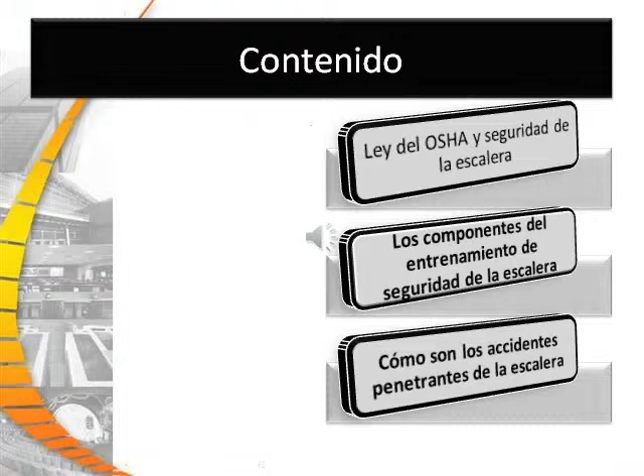Introduction to ladder safety. Falls from ladders and scaffolds are a leading cause of serious and fatal injuries in residential construction. The goals of this course are to help you understand how to correct and eliminate fall hazards, comply with safety requirements and hazards on your job related to scaffold and ladder use, and understand OSHA scaffold and ladder use requirements.

Participants can use the information from the seminar to provide training to their fellow employees, as well as to implement a ladder and scaffold safety program.

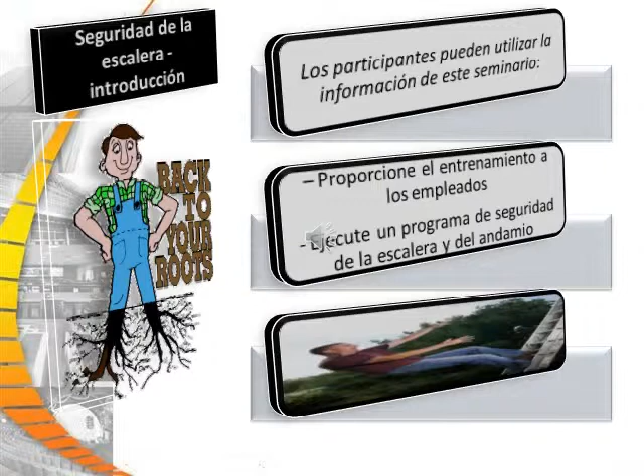Our course objectives will be identifying the importance of preventing falls from ladders and scaffolds, recognizing fall hazards associated with ladders and scaffolds, identifying the OSHA requirements for ladders, stairways, and scaffolds, and identifying work practices for using ladders and scaffolds safely.

Section 2. Importance of ladder safety.

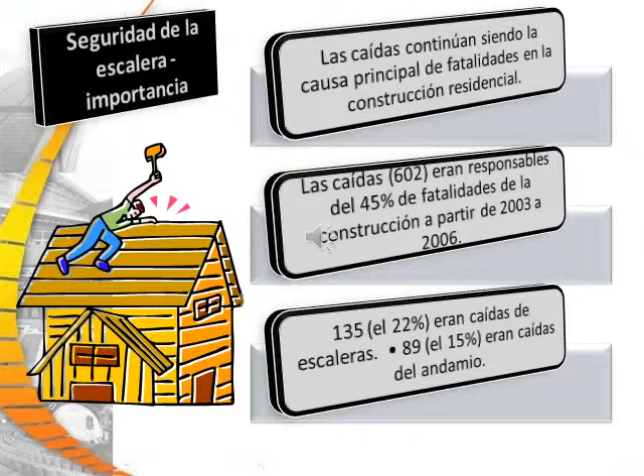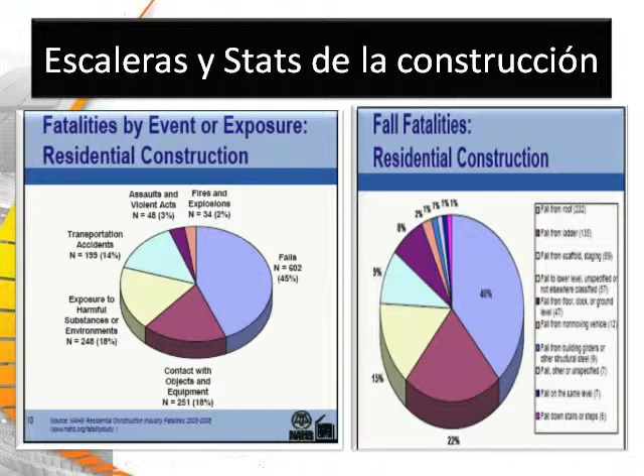1926.451 states that each employee on a scaffold more than 10 feet above the lower level shall be protected from falling. Subpart X covers ladders and states that fall protection is not required for workers climbing or working on portable ladders. It also states that stairways with 4 or more risers, or rising more than 30 inches, must be equipped with at least a handrail and one stair rail along the unprotected side.

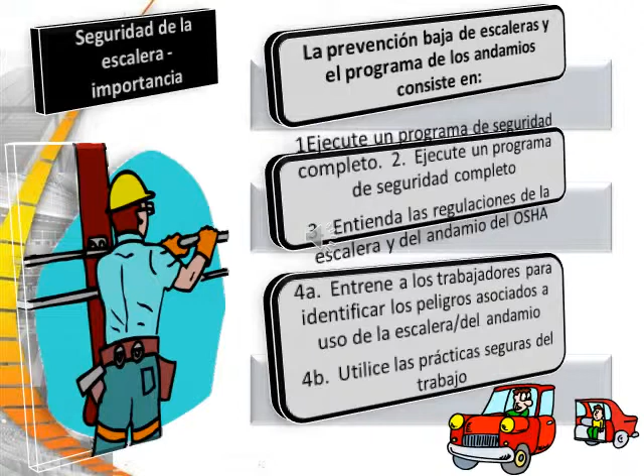Preventing falls from ladders and scaffolds consists of implementing a comprehensive safety program, understanding the OSHA ladder and scaffold regulations, training workers to identify hazards associated with ladder and scaffold use, and using safe work practices.

Part 3. Choosing a ladder for the proper work situation.

First, determine the proper ladder to be used based on weight capacity and height. Next, calculate the proper pitch of the extension ladder for the correct setup, and identify how to secure and stabilize the ladder. Then identify how to maintain a safe position while using the ladder.

Improper ladder setup: portable ladders not extending 3 feet above the landing surface, not securing the ladder correctly, standing on the top 2 steps of a step ladder, and overreaching when working from a ladder. These are all potential ladder hazards.

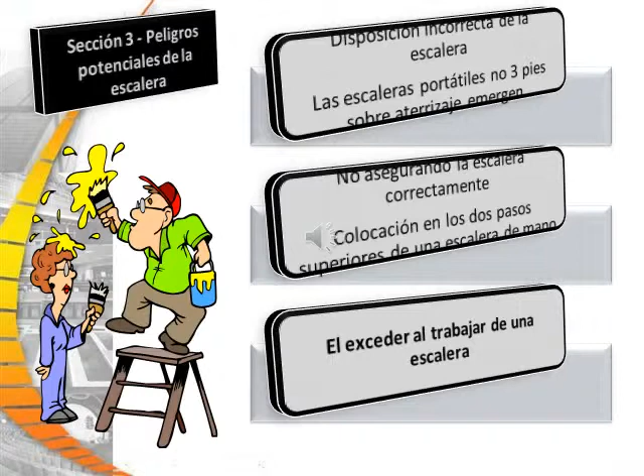Before stepping onto a ladder, think about these things: the duty rating of the ladder, what capacity it can hold, the height of the ladder, whether it's too short or too tall, the condition of the ladder, and any instructions unique to the ladder selected.

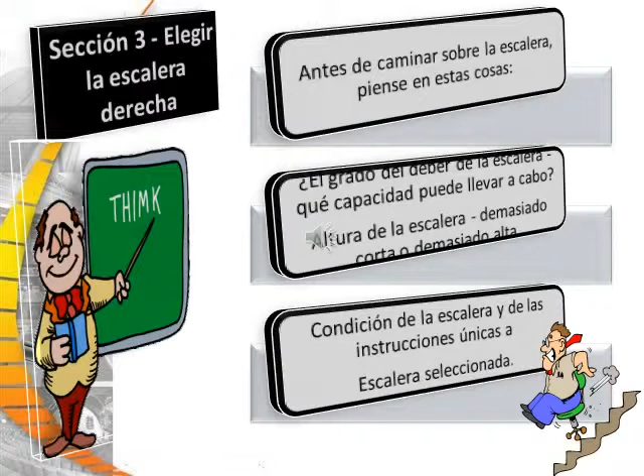Let's review the proper duty rating and capacity of ladders. 1AA are special heavy duty ladders, rugged, for loads up to 375 pounds. 1A ladders are extra heavy duty industrial ladders for 300 pounds. 1 ladders are heavy duty industrial ladders for 250 pounds. 2 ladders are medium duty for 225 pound capacity, and 3 ladders are light duty household ladders for 200 pounds.

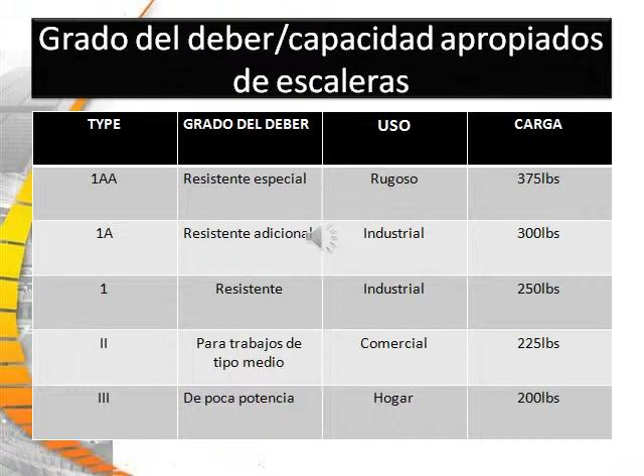The OSHA requirement for ladders: they shall not be loaded beyond the maximum intended load capacity for which they were built, nor beyond their manufacturer's rated capacity. So states the general duty clause.

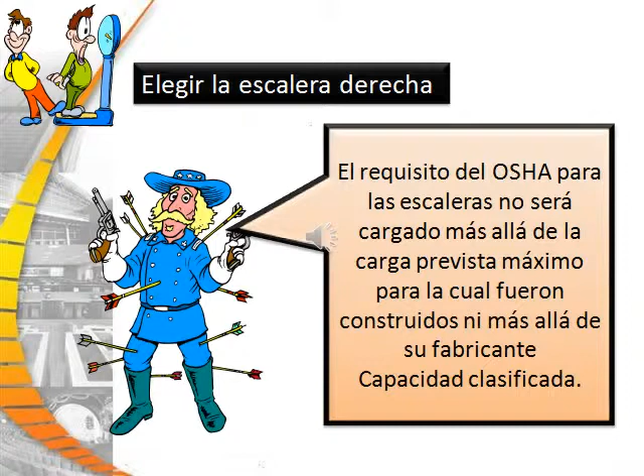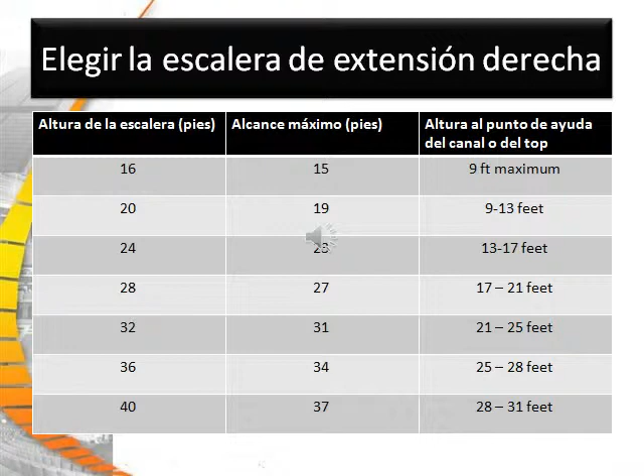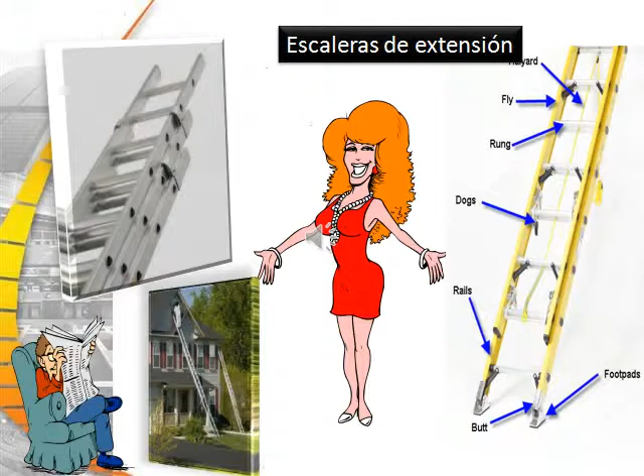Support points for extension ladders reflect the extension overlap, ladder angle, or 3-foot extension above the roof. Good job, comrade.

Remember, the proper ladder setup calls for considering the proper placement and pitch of the ladder. Secure and stabilize the ladder. Good job.

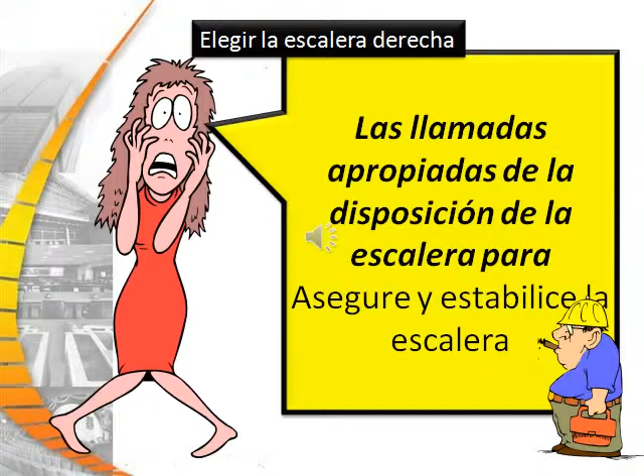Choosing your pitch extension ladder. Remember, extension ladders should be used at least on a 4-to-1 pitch. For every 4 feet in height, the bottom of the ladder should be at least 1 foot away. An example of this is 20 feet in height is divided by 4 for a 5 feet pitch.

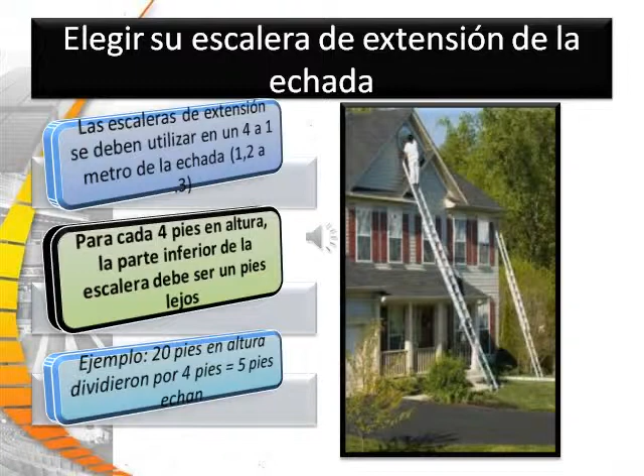When accessing another landing, the ladder must extend at least 3 feet above the landing to provide a handhold for getting on and off the ladder. Never stand on the top 2 steps of the ladder to avoid overreaching.

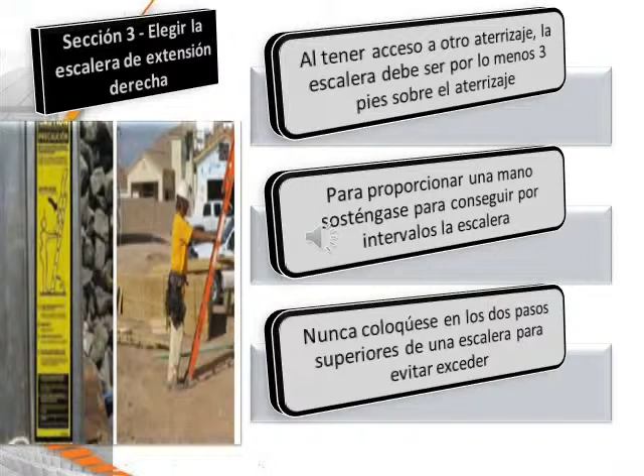Extension ladders should be secured at the top and bottom to prevent movement. The base of the extension ladder should be secured at the base with safety feet or through other effective means.

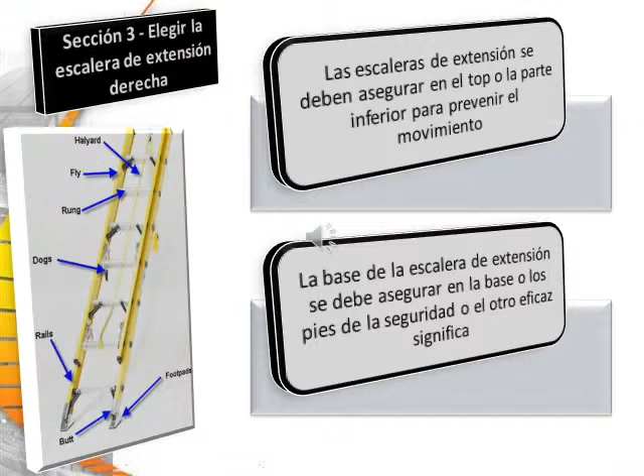To the left on this slide, you'll see that it can be seen above the landing where the ladder is to be secured. Also notice the length of the extension over the landing that is about to be used. At the base, you should see the safety feet, as well as the condition of those feet, which should never be used when the feet are worn out.

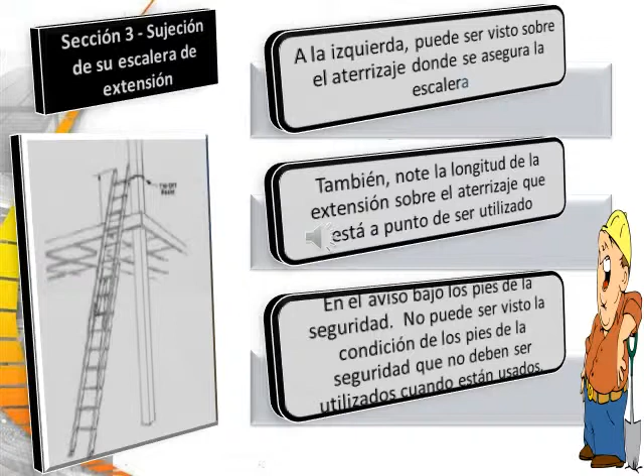To the left is a graphical representation of the proper method of securing the feet. Just below the top graphic is a second example of how to secure the feet.

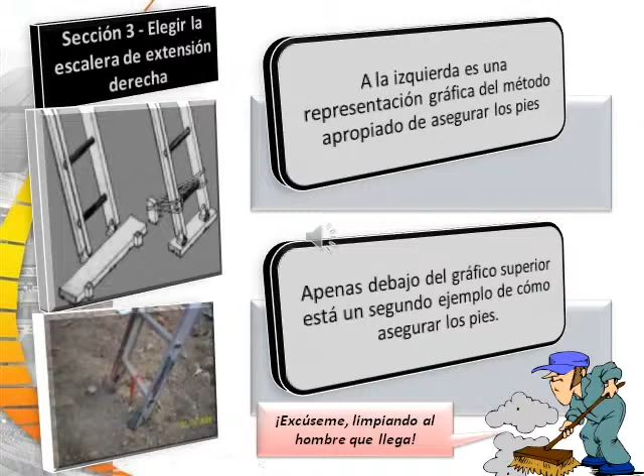Section 3, Securing your extension ladder.

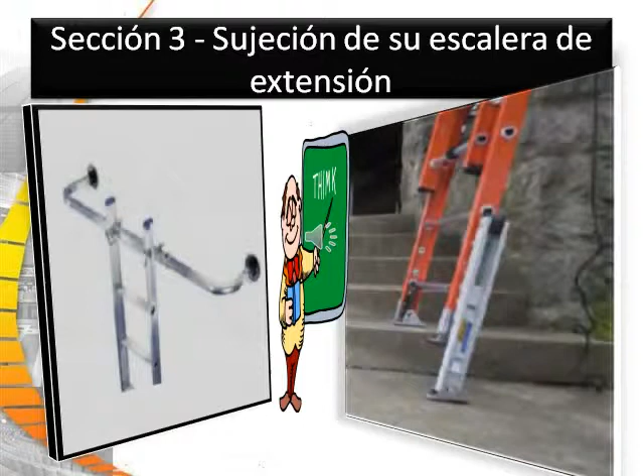On the left, notice how the ladder is placed at a 75-degree angle. Also on the left, notice how the ladder can sometimes be buried in the sand for safety.

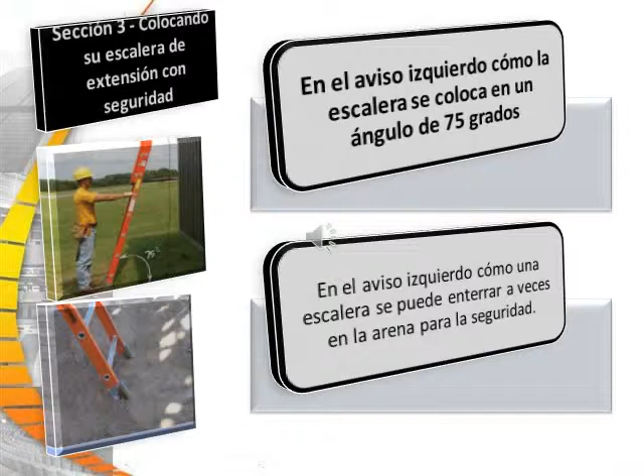Okay, let's say you've chosen your step ladder and you're ready to start using it safely. Let's discuss that.

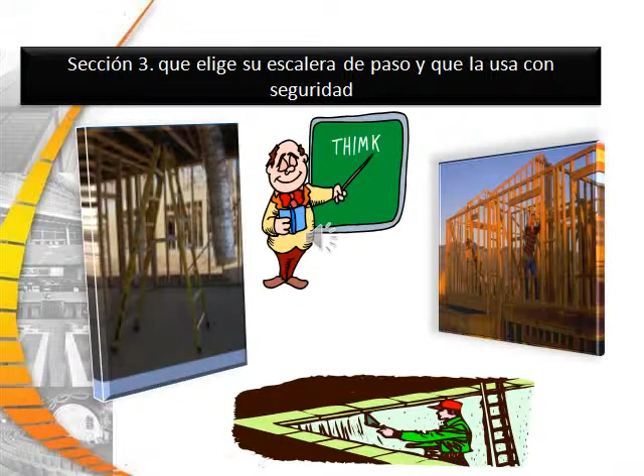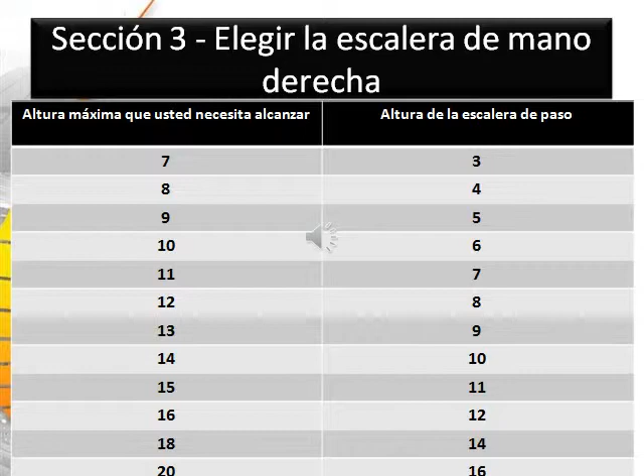Use your stepladder only while it's in the fully open position. Do not use your stepladder when it is folded or in a leaning position. Never sit or stand on the top 2 rungs. Consider the work height when selecting the stepladder.

Stepladders are designed for use in the open and locked position. Do not use a stepladder in a folded or leaning position.

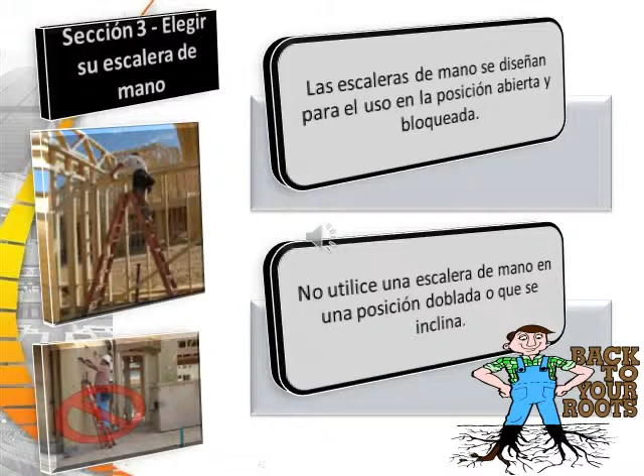Face the ladder when ascending or descending. Maintain at least 3 points of contact at all times. Keep your body centered on the ladder and never let a belt buckle pass either side rail.

That definitely makes horse sense to me.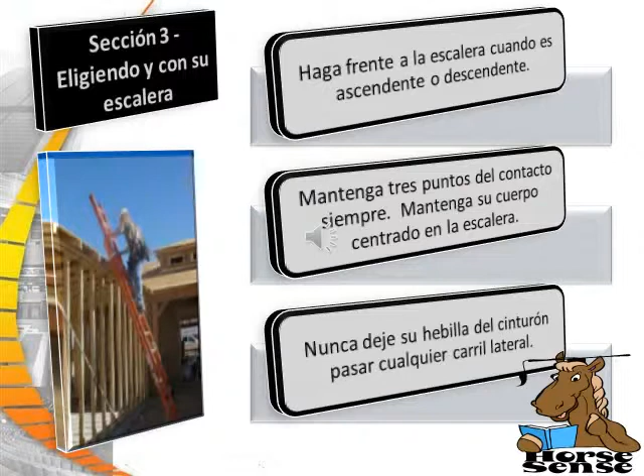Ladders must be inspected before each use. Broken or weak ladder rungs found when inspected must be tagged as defective and taken out of use. Look for cracks and weak points. Competent persons should inspect the ladders on a regular basis.

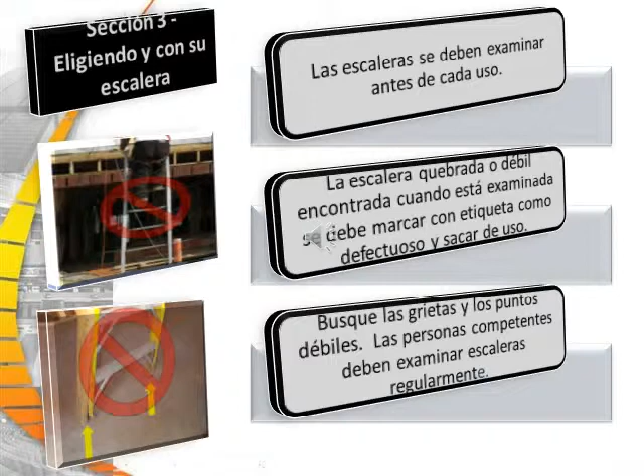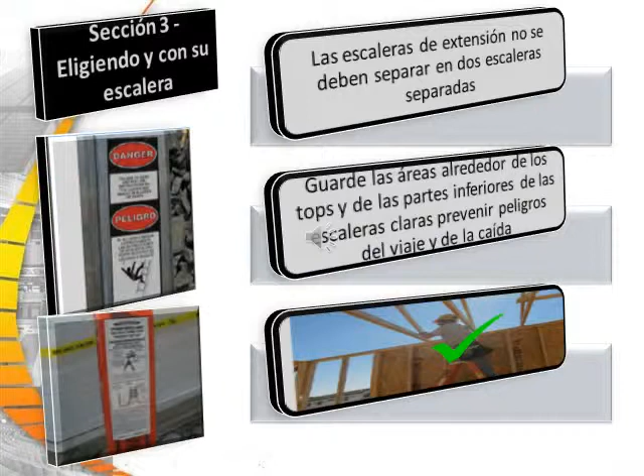Extension ladders should not be separated into 2 separate ladders. Keep the areas around the tops and bottom of the ladders clear to prevent trip and fall hazards. Avoid setting up ladders in high traffic areas, or set up a barricade around the base of the ladders. Ladders must be kept clear of oil, grease, or other slip hazards.

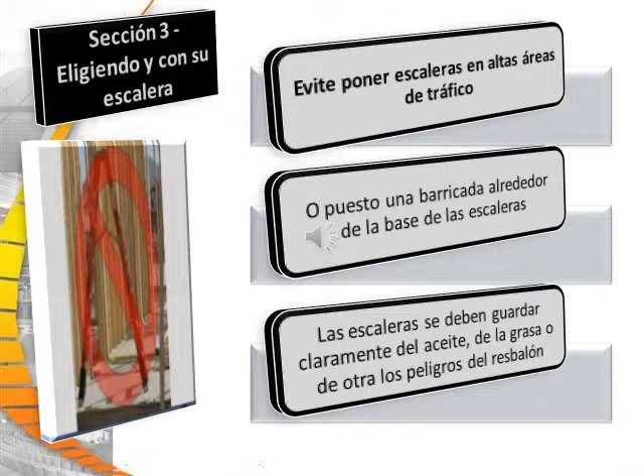Consider using a rope to raise or lower materials instead of carrying them up the ladder. Do not use metal or aluminum ladders when exposed to energized electrical hazards.

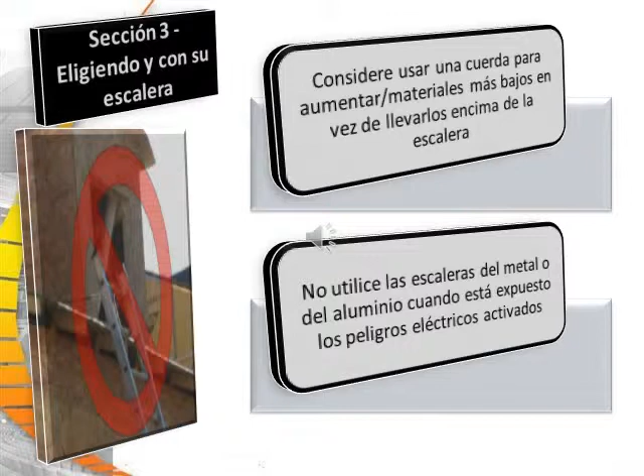Section 4, Ladder Safety Summary.

Do not use metal or aluminum ladders around energized equipment or wires. Do not stand on the top 3 rungs for safety. Keep your shoulders between the rails while climbing or descending the ladder.

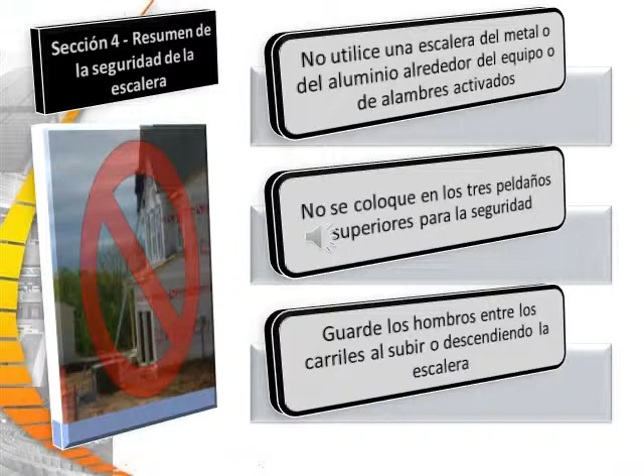Remember to support the ladder at 4 points, and when using extension ladders, put 1 foot for every 4 feet up. Never leave a raised ladder unattended, and never climb up a wet ladder.

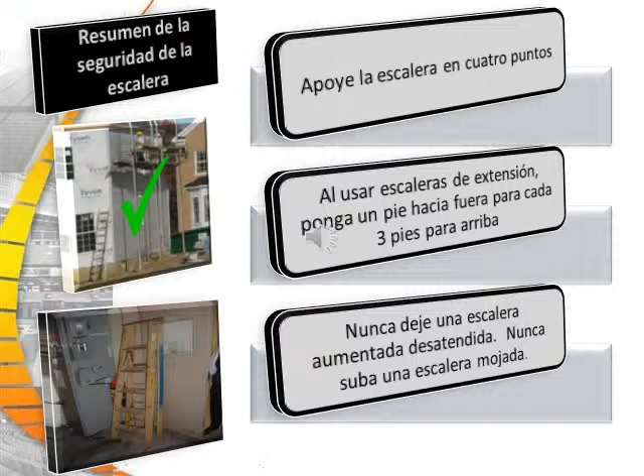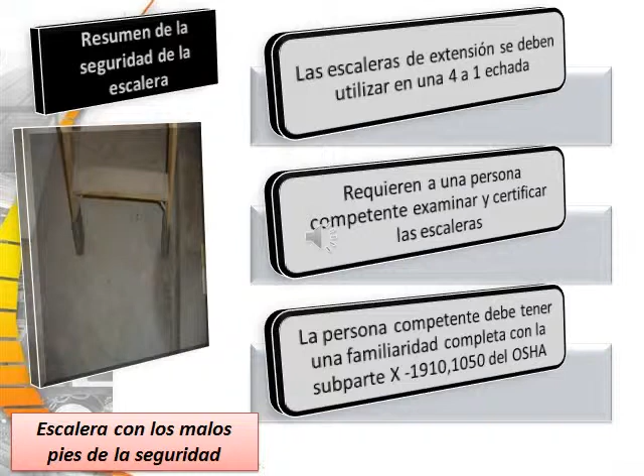Extension ladders should be used with a 4-to-1 pitch. A competent person is required to inspect and certify the ladders, and the competent person must have a thorough familiarity with OSHA Subpart X 1910.1050.